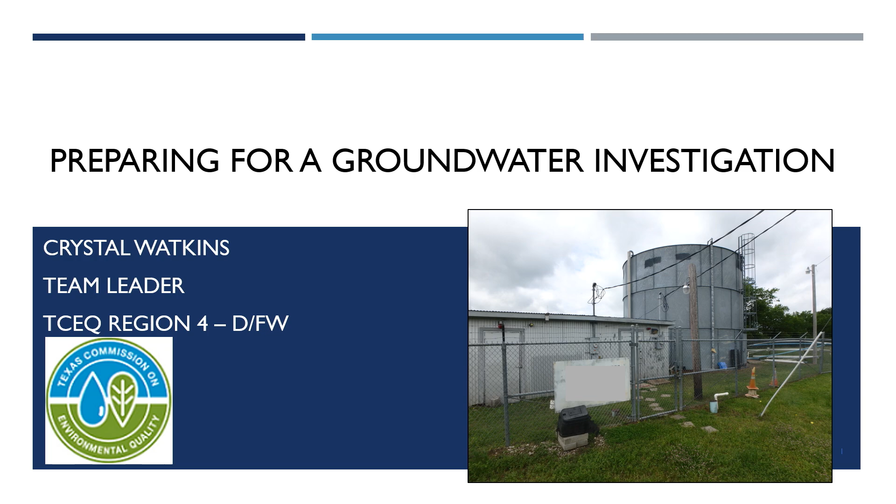Crystal Watkins is a team leader for the Public Water Supply Team in the Dallas-Fort Worth Region Office, in the Office of Compliance and Enforcement. She has a BS in Biology and MS in Wildlife and Fisheries Science from Texas A&M University. Crystal has worked for TCEQ since 2012 as an environmental investigator and now in a management role. Her duties include conducting drinking water investigations, managing a team of environmental investigators, and helping with interpretation of rules and regulations. Please welcome Crystal Watkins.

All right, good morning everybody. As Jackie said, I'm Crystal Watkins with the DFW Region Office, and my goal for today's presentation is to at least keep you from getting one violation from your regional investigators. My goal is for you not to have any violations, but that's my goal for today.

So what we're going to talk about is what is a comprehensive compliance investigation, what should you expect from that investigation, and some common violations that we see in the field, as well as some ways that you can make sure that you're compliant, and some tools for your operator toolbox.

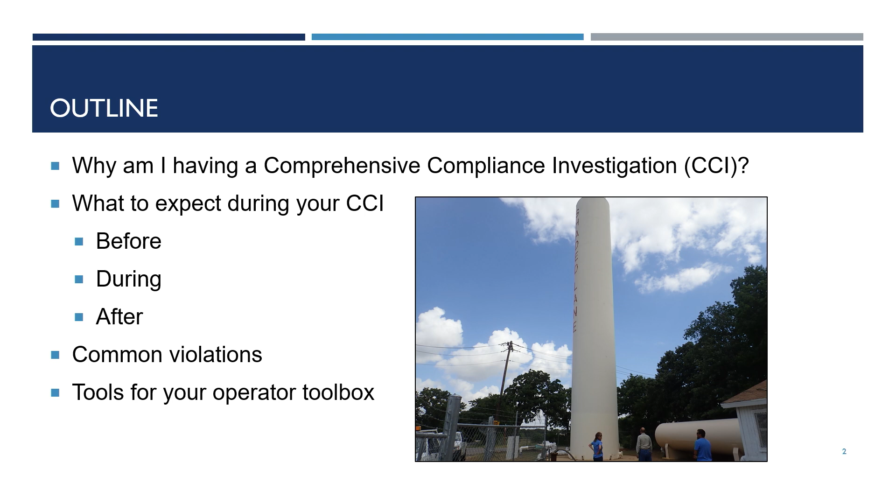So why does the TCEQ have to do CCIs? The reason is because EPA says so. Just like we have to tell y'all what rules and regulations you have to follow, EPA gives us rules and regulations we have to follow in order to maintain our primacy. Primacy just means that we have the ability to set rules and regulations for the drinking water program in the state. Now, if you talk to EPA or go to an EPA presentation, they will call this a sanitary survey.

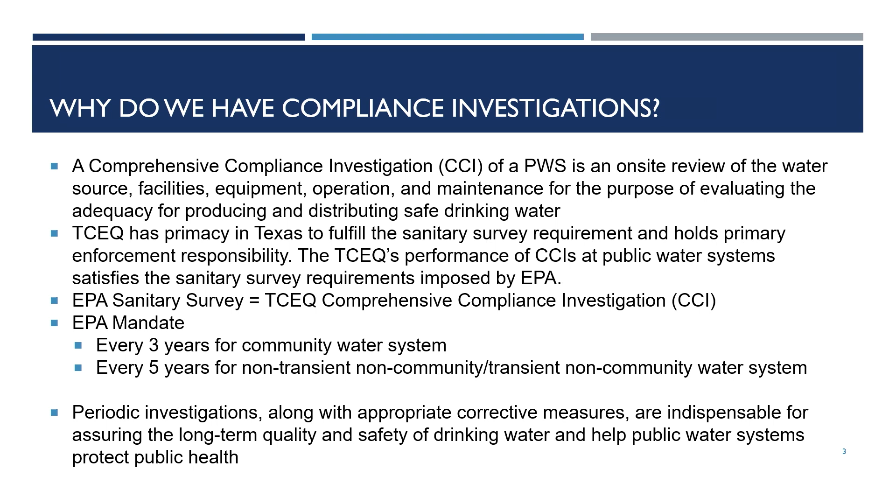This is going to be the same exact investigation that your region folks come out to, but we call it a comprehensive compliance investigation. For all community water systems, we have to come out once every 3 years, and for our non-community water systems, we come out once every 5 years. These inspections, along with correcting violations, are important in protecting public health and the safety of drinking water.

Now this is going to be one of the most important slides of the presentation: how can you prepare for this CCI? Like I said, we're going to send you a list of records. What you're going to want to do is go and gather those records. You can do it either way, but the way we usually see is most successful is when records are labeled 1 through 25. If you set it up with, say, this is number 1, this is number 2, that allows the investigation to go a little bit faster and smoother during this time.

What I highly, highly recommend is you do something called a pre-inspection walkthrough. We have seen that water systems that do their own internal inspection before our compliance inspection are the ones that tend to have less violations. This is things like looking at leaks, looking at your vent screens, looking at any fences, mowing your grass, and please make sure that you check your chlorine residual.

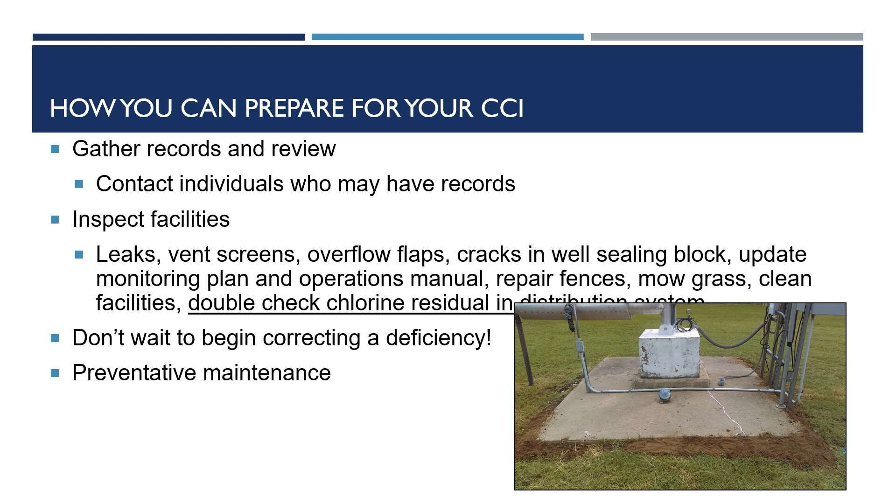That's very, very important. We like to say that there's something called a TCEQ bump, and we know that sometimes people will bump up their chlorine really high to prepare for TCEQ - and I hear laughs because some of y'all do it. We appreciate that because we do not want to have to come out and cite a violation for low chlorine. If you do notice a problem, do not wait for us to come out to fix the problem. And finally, if you have any preventative maintenance items, you might want to check those. Your biggest preventative maintenance item we see is maintaining the area around your facilities.

So with your inspection, or your CCI, there's going to be a couple different parts of it. You're going to have an entrance meeting where we're going to introduce ourselves and talk through the flow. Sometimes, I know for me as an investigator, I like to do paperwork first, but when it's going to be 108 degrees at 2 o'clock, I'm not trying to be out in the field.

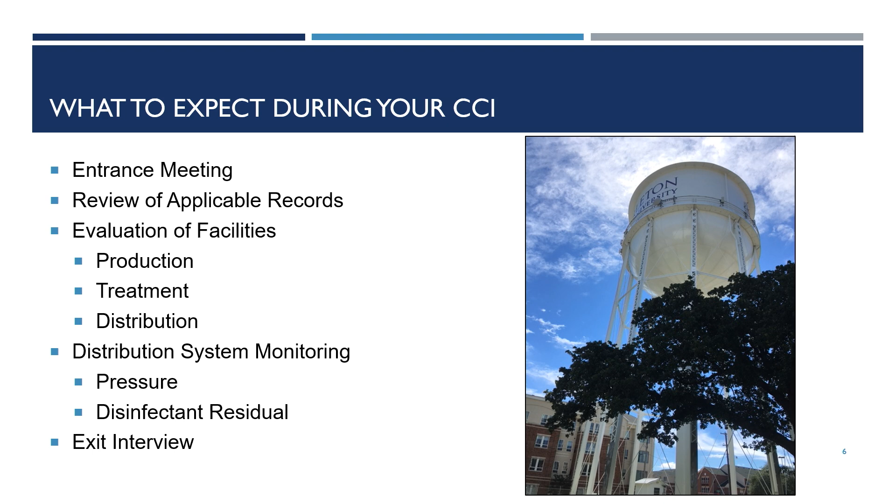So they might do field work in the morning versus in the afternoon. We're going to review our records and go to all your applicable facilities, then finally into the distribution system. To wrap it all up, we do an exit interview, and you'll get an exit interview form that notes any violations or corrections we recommend. We're gonna outline our objectives.

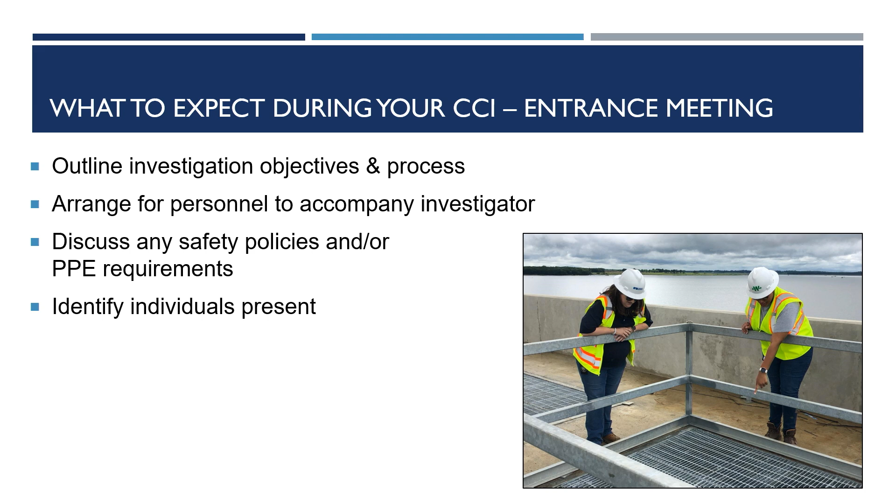If there's any PPE, we're going to ask what we should have, and then identify anybody who is present. Now one thing I do want to highlight, because we see it quite a bit, is what is a connection.

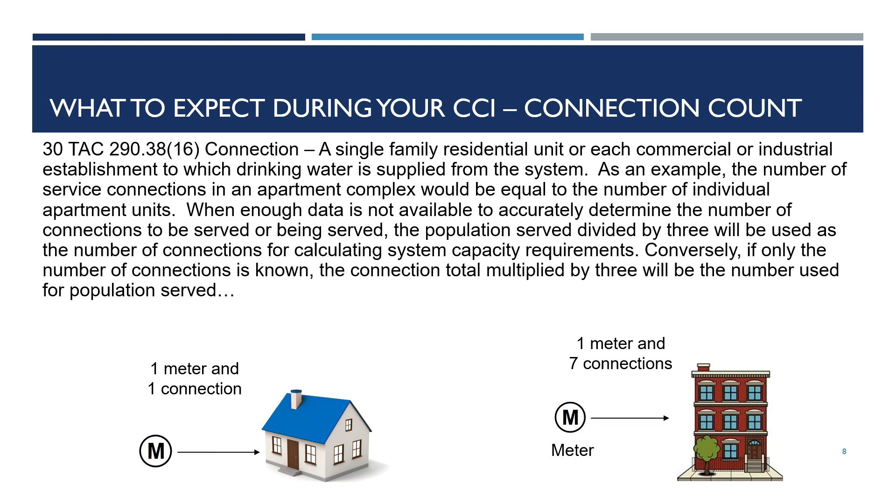The definition of a connection is a single-family residential unit or each commercial or industrial establishment. So if you just serve homes, one connection equals one home. However, if you serve something using a master meter, like apartment buildings or RV parks, the 1 meter to 1 connection rule does not work here. You'll have to count each individual unit behind that master meter.

You might have heard in previous presentations about the 8-to-1 rule. During the last legislative session, it was established that for RV slots, if there are 8 RV slots in the park, it counts as 1 connection. So your investigators may ask if you serve RV parks, and your connection count might grow because of this new rule.

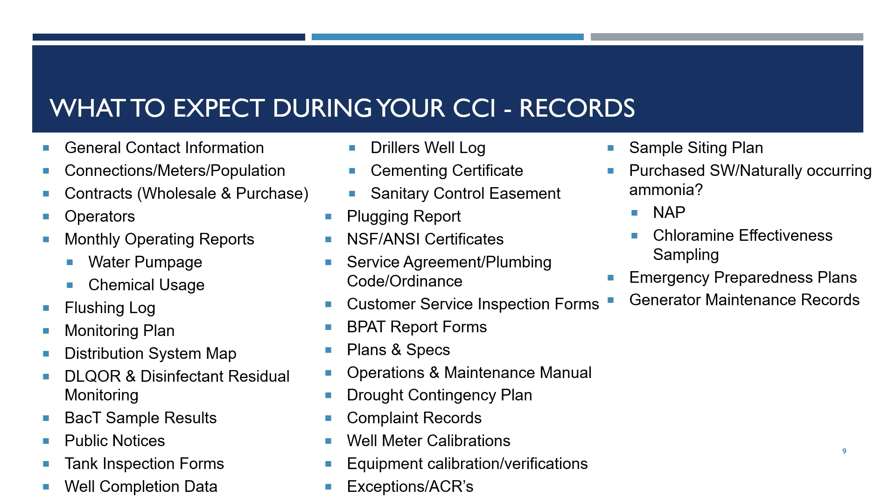So here are some of our requirements. Let's talk about monthly operating reports. We call it that because we borrowed the term from surface water, but this is just the amount of water you're using weekly or daily, the amount of chemicals you're using weekly and daily, and your disinfectant residual weekly or daily. You can have this all in one document or keep it separate, whatever works best for your water system.

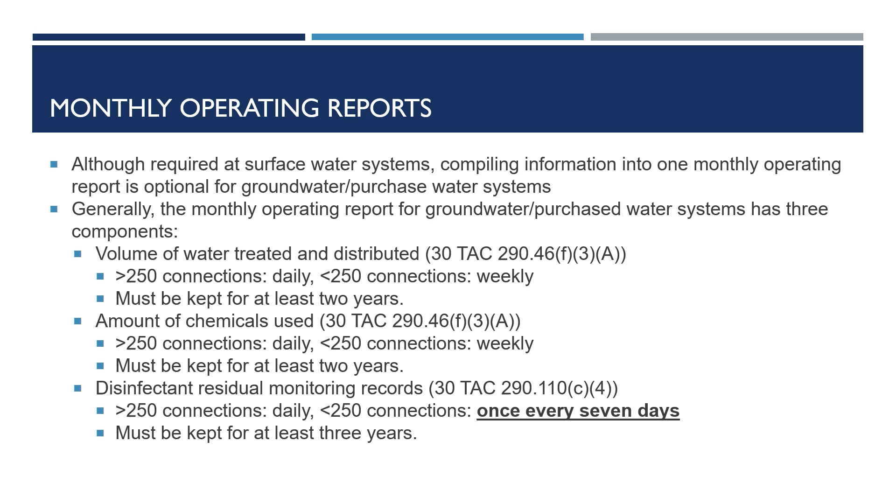If you have less than 250 connections, you have to monitor weekly. If you have more than 250 connections, you have to monitor daily. One thing I really want to highlight is the wording difference between weekly and every 7 days. Your disinfectant residual monitoring has to be done once every 7 days, and that's different from your volume of water treated, which is once every week.

So for volume of water, if you monitor on a Sunday and then the next week you monitor on a Tuesday, you're compliant with the rule. But you would not be compliant with the every-7-days rule because you went more than 7 days. What we tend to find is most water systems will just monitor everything once every 7 days.

Some common mistakes we see: not recording the amount of water according to what the rule says, so people do it once a month or twice a month instead. If you have less than 250 connections, you should do it once a week. If you're more than 250 connections, you want to do it every day, including weekends. That's one of the other things we note as well.

Another thing we see with chemical usage data is not recording how much chemical is actually used, but instead counting how many bottles were put back into the reservoir. It's really important to know how much chemical you're using, because that information determines where your chlorine residuals should be based on demand and volume of water treated. Make sure you keep accurate records. One way we've seen: if you have a clear barrel and use sodium hypochlorite, people mark the side of the barrel with a conversion of how many inches equals gallons.

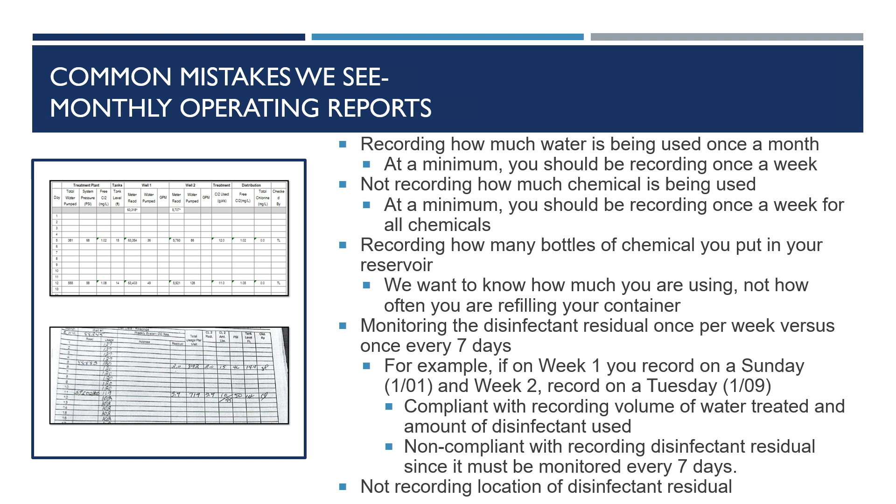One of the rules we check during our investigation is determining if your disinfectant residual sites are representative of your distribution system. If you don't have that location noted, it's hard for us to determine compliance. We also do complaint investigations in addition to CCIs, and one of the things your investigator will ask is, can I see your chlorine disinfectant residual records? If you have those locations, we can use that information to substantiate or not substantiate a complaint.

Tank inspection forms. The rule says all ground storage tanks and pressure tanks have to be inspected annually. And if your pressure tank has an inspection port, you have to go inside and do an interior inspection once every 5 years. Another common thing we see isn't necessarily a violation, but something we might note as an additional issue.

You want to make sure each one of your ground storage and pressure tanks is on its own separate inspection form. If you just do one that says everything is good, or one form for all tanks with a noted problem, we can't tell which one needs to be addressed. You can do the inspections yourselves, water system personnel can do the inspections themselves.

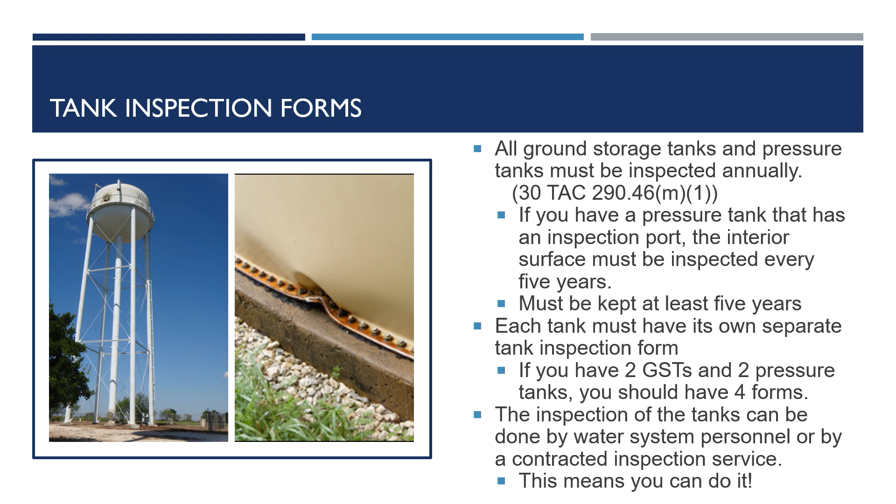I know that's something we've run into where people think you have to hire an outside contractor, and that's not absolutely true. If you're brave enough to climb up the elevated tank, have at it. I'm not, so you can hire a contractor or send your bravest employee up there to do the inspection.

I wanted to show some things we've seen in our inspections. This is actually a dead mockingbird in the ground storage tank. This was the first tank of the day for the inspection, and so I climbed up there, and then climbed 13 other tanks over the next 2 days just to make sure there were no other birds, and luckily there weren't.

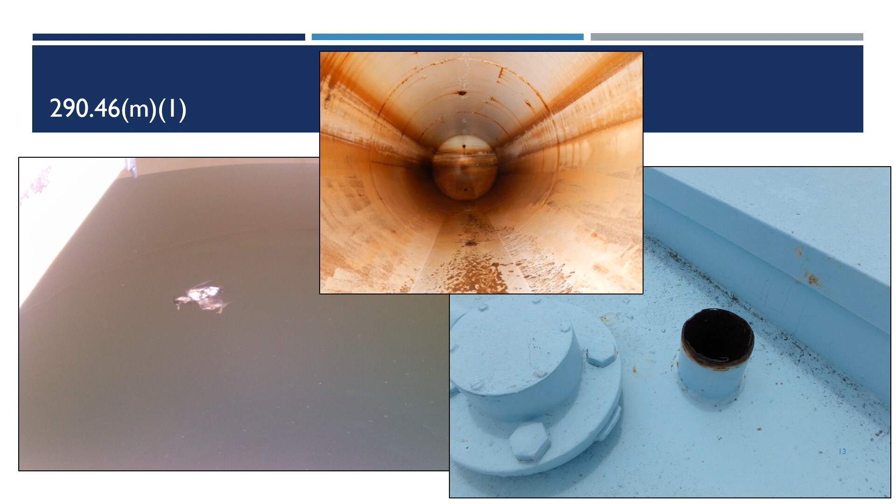We also can see rust on the inside of your pressure tank, which can tell us you might have issues with it, and it may need to be put out of service for maintenance. If there are any open holes or whatnot, make sure you're addressing and fixing that, because these are ways pathogens or birds can enter into your ground storage tanks or elevated storage tanks.

Here's what the forms look like. This is a TCEQ form you can find on the TCEQ website. You can use this form, we see quite a bit of people use it, or you can use something you've created yourself. You just want to make sure your internal inspection form follows the requirements of 290.46(m)(1).

Problems we find: again, one tank equals one form. That might not necessarily be a violation, but it's something you want to make sure you're doing as part of your pre-investigation check. Make sure to identify the tanks, especially if one of your tanks is in fairly bad condition, so we can match them up.

This is also important for complaints too. Sometimes if someone complains about brown water, is it really a manganese iron issue, or is it because one of your tanks is really rusty on the inside? And not inspecting your pressure tank once every 5 years with an inspection port is another issue we see.

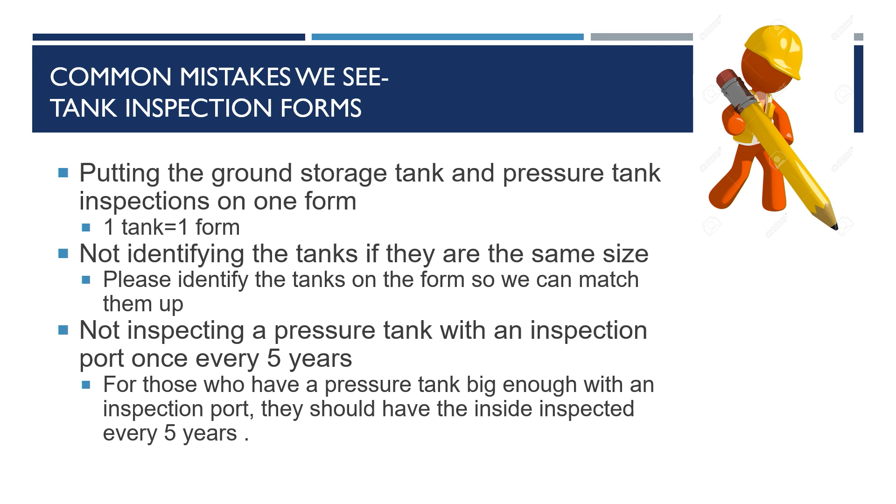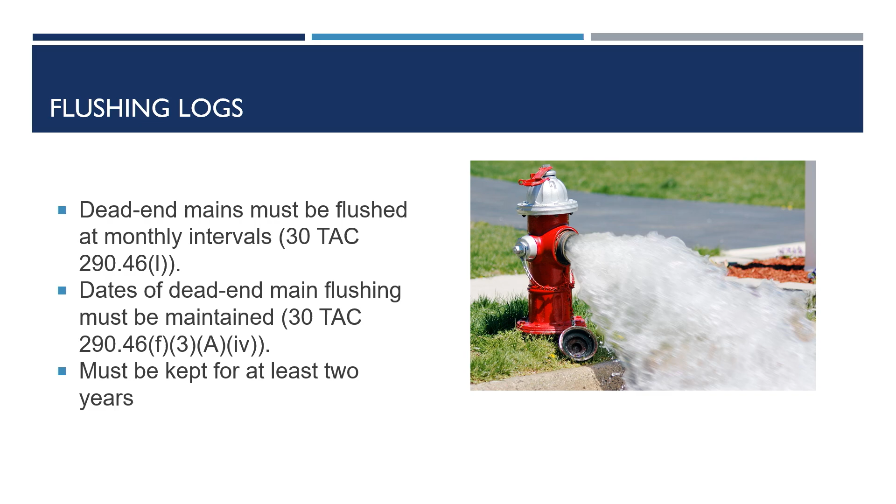Flushing logs. The rule says all dead end mains have to be flushed once a month, and you have to have the dates of the dead end mains. There are a lot of other water systems, which we're very appreciative of, that do a lot more best management practices, noting how many gallons they flush, the chlorine residual, things like that. That's absolutely great, but the requirement just says the dates, so make sure you put the dates.

I also recommend putting the addresses of where you're flushing. When we're looking at your distribution map and identifying your dead end mains, we can ensure those are being flushed on a monthly basis.

The biggest thing we see is not having a flushing log, so make sure to have one. If your system is looped, just make sure you have a map showing that it is looped, and therefore you don't need a flushing log.

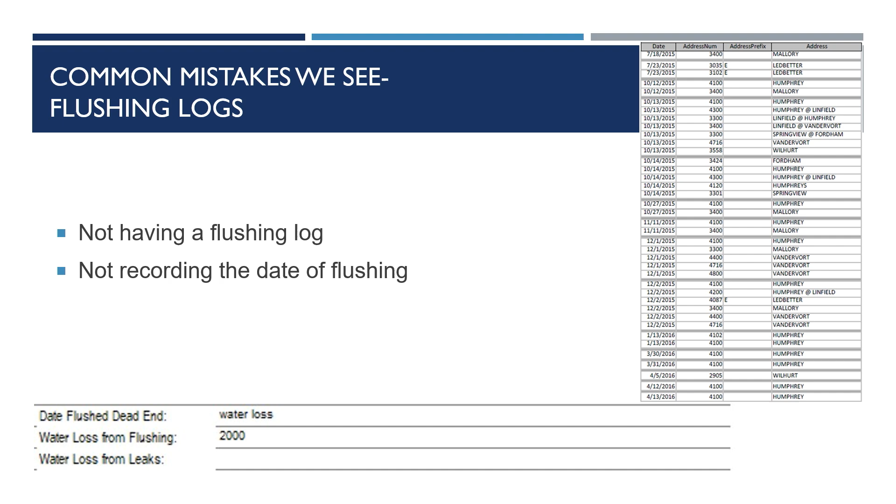The rule also says you should flush on a customer basis. So even though you're a loop system, you may still have a flushing log because you are flushing based on customer complaints. You also want to make sure you are recording the date — right here where it just says water loss is not compliant, and we would note a violation there.

One of the things I want to mention is in December 2023, there was a set of new rules that came out, a lot of which came through Winter Storm Uri. One of the big changes in terms of record keeping is your plant operations manual.

Before, the plant operations manual was a little bit small, a little bit skimpy. Now it has expanded to a very big document, probably very similar to one of your monitoring plans. That rule is still in 290.42L, but you have to identify critical plant equipment, treatment chemicals, which vendors, if you need backup vendors, where you can get chemicals, where you can get supplies, key personnel, and other information.

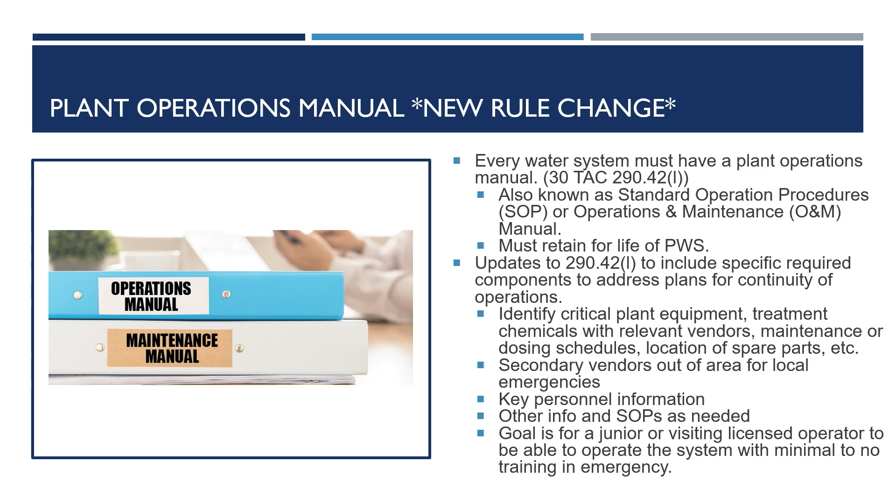And SOPs as needed. So if you have a certain iron filtration system or some other unique treatment system, you're going to want to have an SOP on how to manage that. The goal is that junior personnel could come in, look at your SOP and your plant operations manual, and operate the plant. This is another document that could be very helpful.

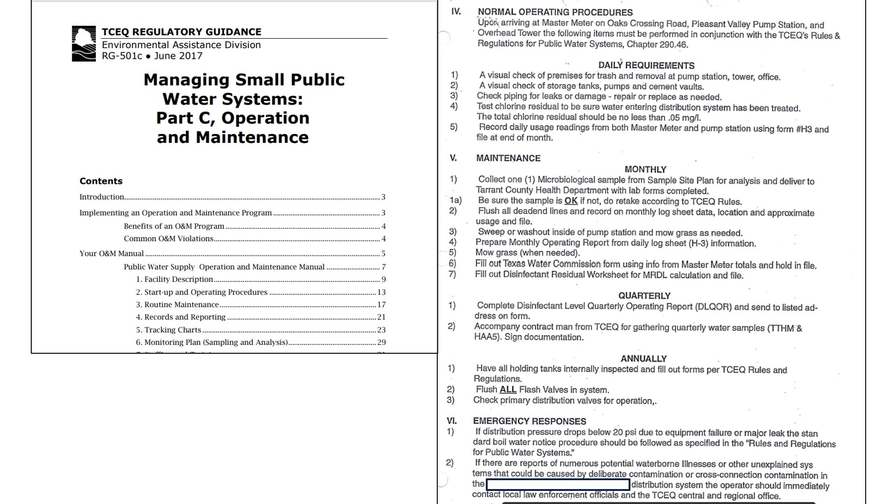One of the reasons we expanded the plant operations manual is that after Winter Storm Uri, there was an after action review, and a lot of operators indicated in our roundtable sessions that they were ill-prepared or didn't know how to operate some of the key critical plant equipment. So our thought is, of course, let's give you more paperwork to fill out — but we're hoping this expanded plant operations manual can prevent something like that from happening again.

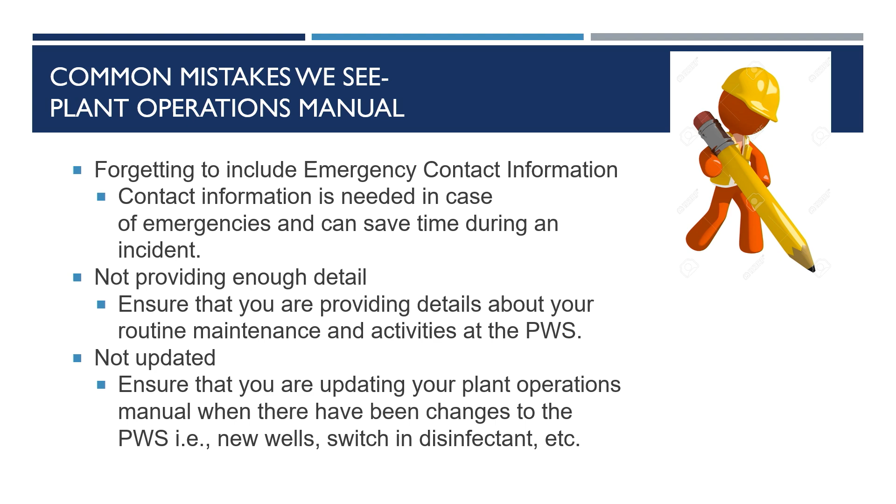Some of the things we see are not having emergency contact information, which is one of the key requirements of the plant operations manual, not providing enough detail especially with the new rule change, and not updating it.

So if you're a water system that went from having a well system to a purchase water system, or changed from liquid to gas, we don't see a lot of people update their facilities at that point. Make sure when you're having a significant change that you're going through things like your monitoring plan and your plant operations manual to make sure it's up to date.

Backflow. The BPAT — backflow prevention assembly test and maintenance form — is very, very important. We've seen in the last couple of years that having a compliant BPAT form has made or broken a situation we had.

It's part of a cross-connection control program, and that program helps ensure you are protecting your water system from the outside. That includes your customer service inspections, a plumbing ordinance if you're a governmental entity or a customer service agreement, and then your backflow form.

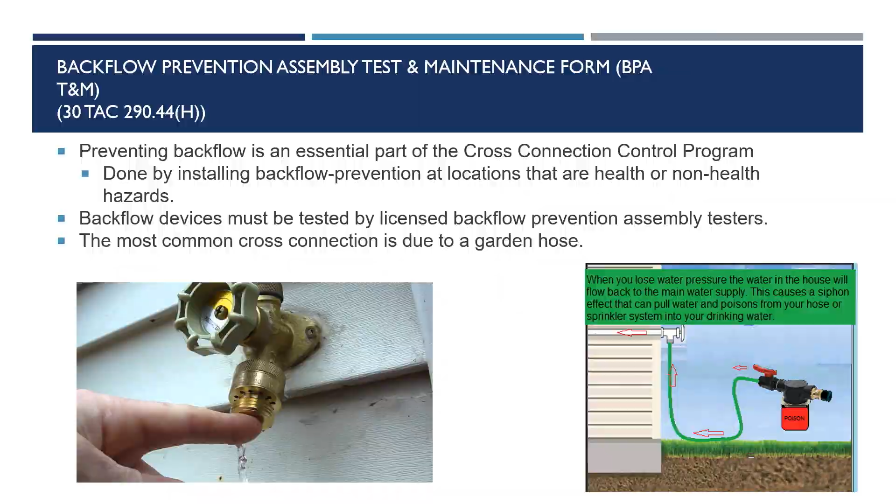Your backflow devices have to be tested by a licensed tester, and the most common cross connection is a garden hose. Someone dumps a garden hose into their swimming pool to fill it up, there's a break outside, and now that chlorinated water is pulling back into the distribution system.

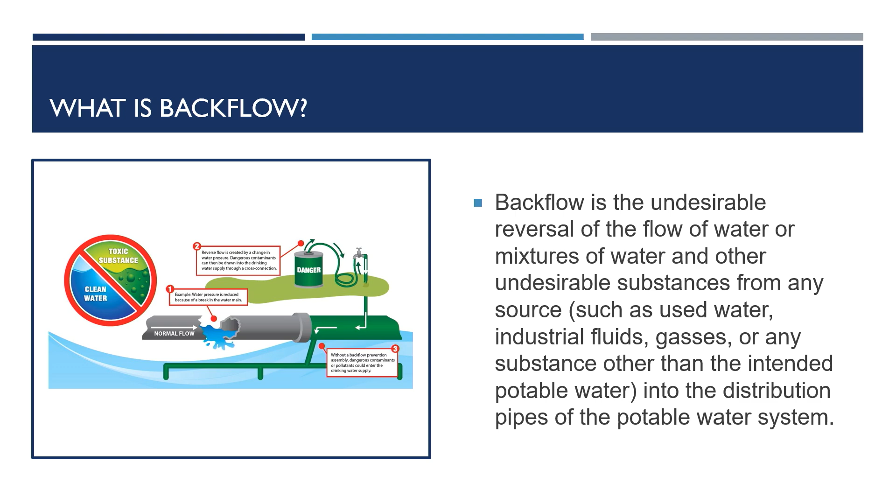If you're not aware of what backflow is, it's the undesirable reversal of flow of water or mixtures of water and other undesirable substances. A backflow of coffee, which sounds great since you'd have an unlimited supply, is actually an undesirable issue because some people may have interactions with caffeine in their medication.

In our rules, we have a list of facilities that will qualify for having backflow. Items considered a health risk need to have either an air gap, an RPZ, or an RPBA, and those have to be tested annually.

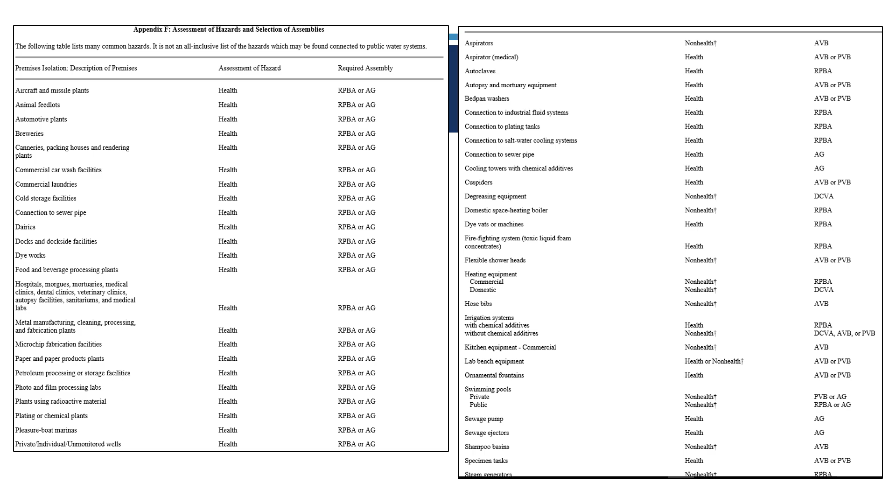As an investigator, what I will do is take this list and start Googling. So I will search 'City of X dentist office' and build a list of facilities. I will also ask the water system if they have this information.

If you are a city and you have a wastewater or pretreatment program, that program is going to have a list of people who are using that water. That will be a great start in trying to figure out the systems that can cause a health hazard.

One thing I want to point out is that interactive water features and splash pads are considered a health hazard, so you want to make sure those items have an RPZ and are tested on an annual basis. Some of the common items we see is having an outdated form.

The form has been updated, I believe in 2019, and you want to make sure you're using the right form. If you want to use a form that's different from our standard form, you have to obtain approval for use of an alternative backflow form. If you're going to use an outside company to have electronic versions, you're going to need an exception to the rule for that as well.

One thing we do see is that the test gauge that your backflow tester uses is out of date. So when you're looking at the backflow forms from your customers, make sure the tester's gauge is within a year of when the test was done.

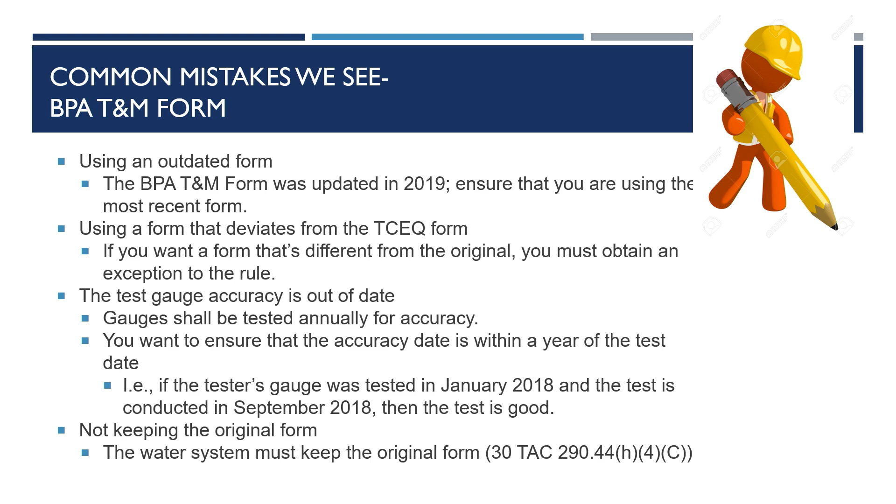Another issue is not keeping the original form. If you're a facility or system requiring people to submit backflow forms, make sure to keep the original and give them the copy.

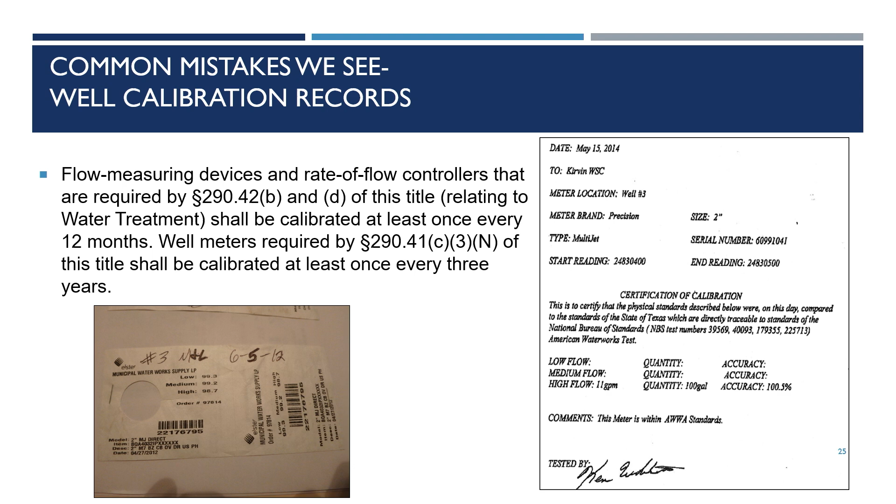Well calibration records: if you have a groundwater well, you have to calibrate your well once every three years. You can either calibrate it or replace it. We had a question about this last year.

You can do self-calibrations of well meters as long as you indicate what method you used and keep that information. But some of the common issues we see is that people doing self-calibration aren't putting in information about dates or what the expected result was versus the actual result.

Another new thing that has come up is emergency preparedness plans. Winter Storm Uri caused a lot more paperwork to be generated. This document used to only apply to Fort Bend and Harris counties, but now it's included for all systems across the state.

If you serve one residential connection, you have to have an emergency preparedness plan. But if you're a non-community system like a warehouse with nobody staying overnight, an emergency preparedness plan does not apply to you.

We do have options for water systems that are not financially able to implement an emergency preparedness plan or some of its options. You can ask for a financial waiver. There are 14 options, but actually more since some options have an A and B variant.

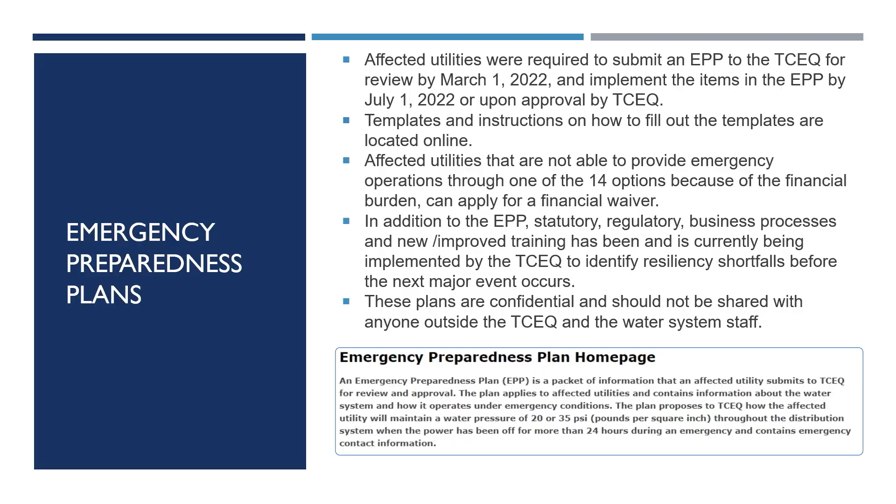One thing I want to point out again is that for emergency preparedness plans, you do not have to enact the plan every time there's a water outage. The plans come into play only when there's an extended power outage. So if you have a water leak and water goes out, that does not mean you need to enact your emergency preparedness plan.

Another new requirement is generator maintenance in relation to emergency preparedness plans. If you have a generator, we now have a lot more rules about how to maintain it. I believe that's rule 290.46(m), possibly subsection 4.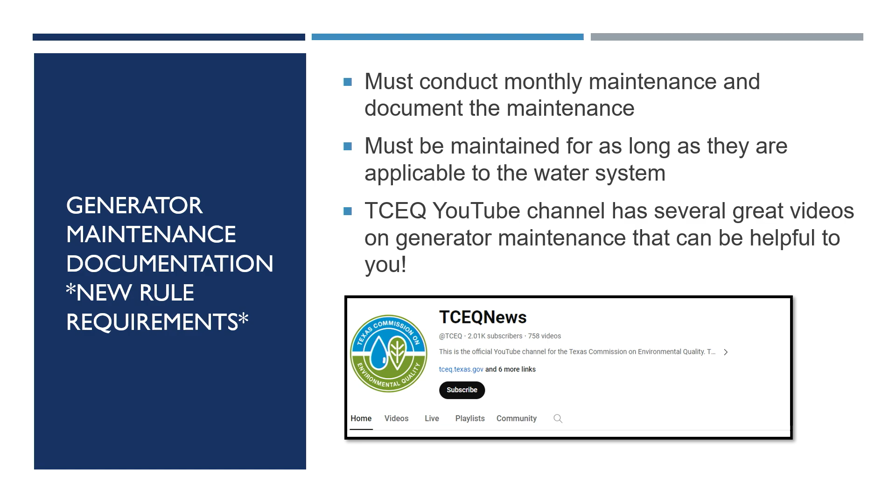One of the big things is you have to be able to run your generator, your whole system, under 30% load for at least 30 minutes once a month. You also have to check your generators once a month for a list of items in our new rules. On our TCEQNews website or YouTube channel, there's a generator maintenance video series that's very detailed and can help you with maintaining your generators, as well as information about emergency preparedness plans.

All right, so we got through all that paperwork.

Now we're gonna go out in the field, and we're going to look at everything from where the water comes out to right before it hits into your distribution system.

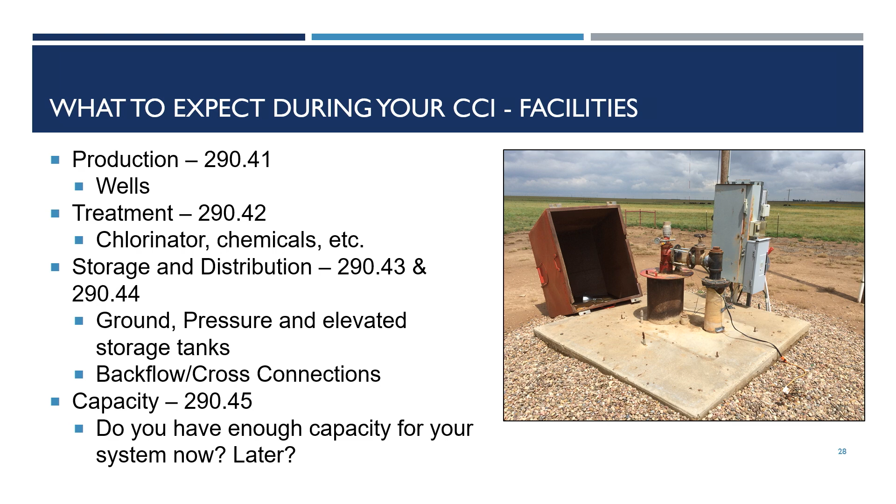Some of the things I want to point out—these are all real photos, but those who are in these photos are protected for their identity.

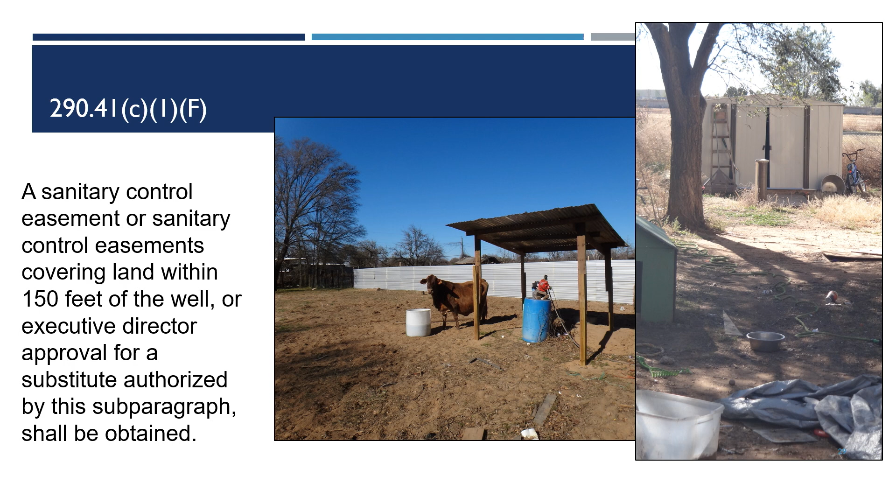Make sure there's not a cow near your well. That blue thing is covering the well, and there's a pump, and there is a cow. Needless to say, the water coming out in that area was pretty foul. You want to make sure you have a sanitary control easement that protects your well 150 feet away, and specifically, livestock are not allowed within 50 feet of the well. I think that's a little closer than 50 feet.

Now, I know some of your pump stations are near a neighbor who has livestock, and sometimes they come right up to your fence. What you can do is ask for a sanitary control easement exception. That's for when you cannot guarantee you can keep all hazards within 150 feet away. Usually we would require you to take a raw bacteriological sample for a month to make sure that granting this exception is not causing any contamination of the well.

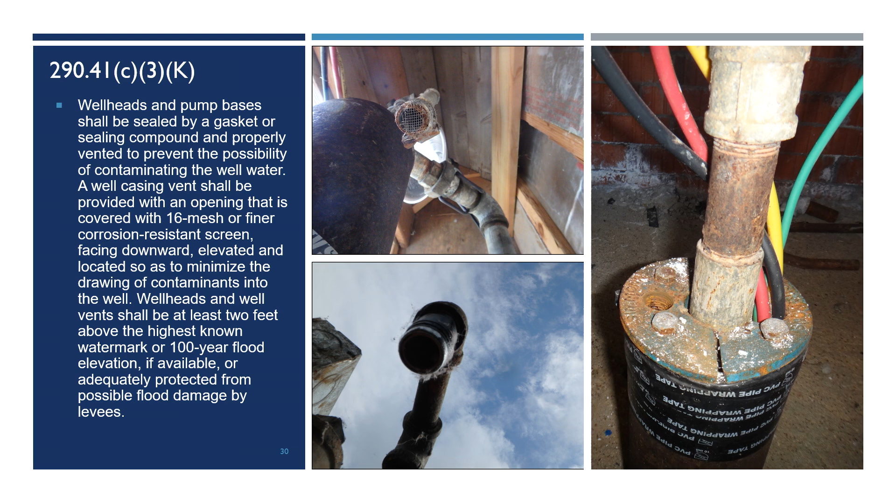Next is some other well items, such as making sure that your wellhead is sealed and doesn't have a big crack. Another thing is making sure your well vents are gooseneck—pointing downward—and covered with a screen. A lot of our rules are about preventing any potential sources of contamination from impacting the water system at different points. So this is the source water protection that we have.

We do require disinfection, and despite what some people in Texas think, chlorine is not going to kill you, but we get those complaints quite a bit. We want to make sure you're disinfecting and your equipment is being used appropriately.

One thing we do see is people using household bleach, and that is not appropriate. You want to use something NSF Standard 60. Back when I started, there was a list of bleach you could find at common grocery stores. I think someone found out we were recommending their product and said, we cannot guarantee this. So now you have to use NSF Standard 60. There are vendors or manufacturers that will sell you NSF Standard 60 bleach in that small gallon size. You can reach out to your appropriate vendor for that information.

I always love seeing the trash can holding area. Just make sure you're using an appropriate container that can hold the volume of liquid, as well as making sure it's not open to the atmosphere.

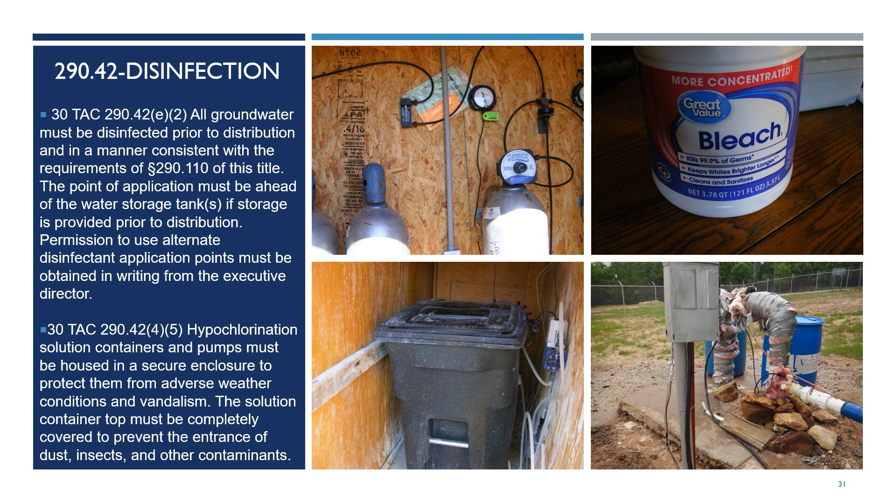You also want to make sure some of your facilities are protected against adverse weather. Having your disinfection pumps out in the open where they can be beat by hail, storm, and rain is probably not a good idea.

For water storage, we ask that your pressure tanks and ground storage tanks are meeting AWWA standards. A black poly tank is not an AWWA approved tank; however, TCEQ will sometimes provide exceptions for using a black poly tank. If you try to put in an exception for a white poly tank, you're going to get it denied, because we've seen algae grow into white poly tanks left outside. So even if you don't have AWWA approval, you can always ask for an exception, and if you provide the information, there's a good chance it can get approved.

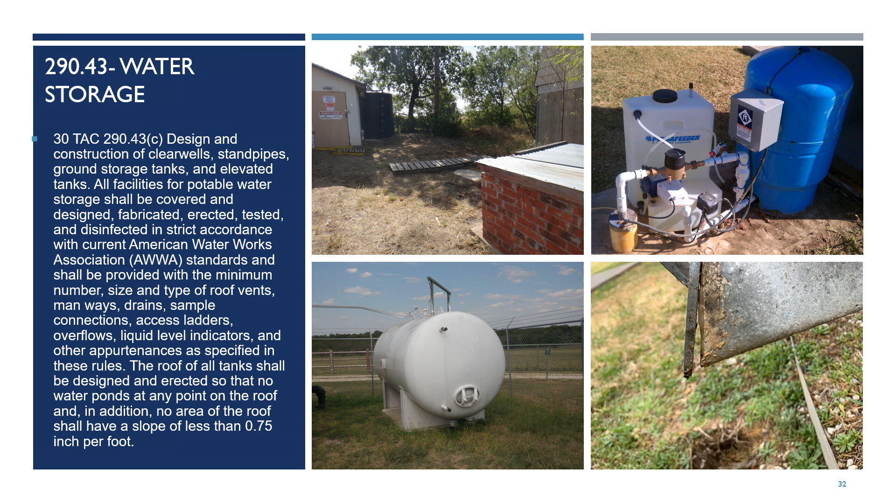Another thing we see is with your overflow valve—you want to make sure it has a gap no bigger than 1/16 of an inch. That is a very common violation we would note during a CCI.

Your distribution lines have to be underground, not just crossing a creek held together by duct tape and a prayer. What was notable in this instance is that along the creek, you could see lots of broken parts where it had broken and the water system fixed it. Yeah, it was not fun.

This is also a water line that is less than the requirement underground, I think it was less than 2 feet. So if somebody was doing road construction, like if the county comes in and starts breaking up the road, well, now they hit your water line.

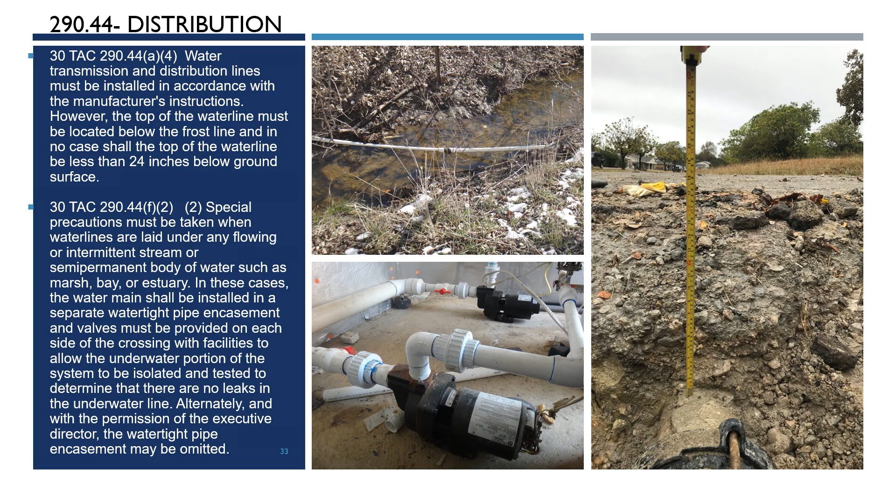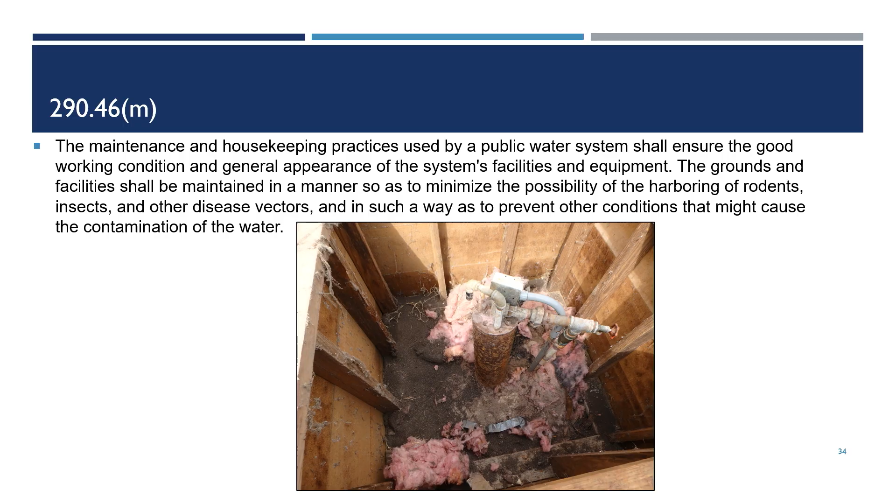We also have a general housekeeping violation, so you want to make sure your facilities are in good working order. Make sure your grass is not knee-high, and take all the trash away from your pump station and facilities. You want to make sure you're not providing a haven for vectors or critters to stay around your area. I'll tell you, one of my investigators went on an investigation, and when he opened up the pump station, there were like 200 cats in there.

There was a hole, and the guy said, heck, like 2 weeks ago there was double the amount, but some illness got them. Isn't that what you love to hear? And get this, it was a restaurant. Don't you love to hear that? So yeah, just make sure you're not providing a haven for ill and sick cats to come around your well and potentially pass on any vectors.

Another thing we also see, I think in this picture, my staff member found a 6-foot long snake skin. So I always make a joke that if I get bit by a snake, you're going to enforcement. That's not anything in the rule, but if I see a snake or if I get close to one, we're not gonna have a good time.

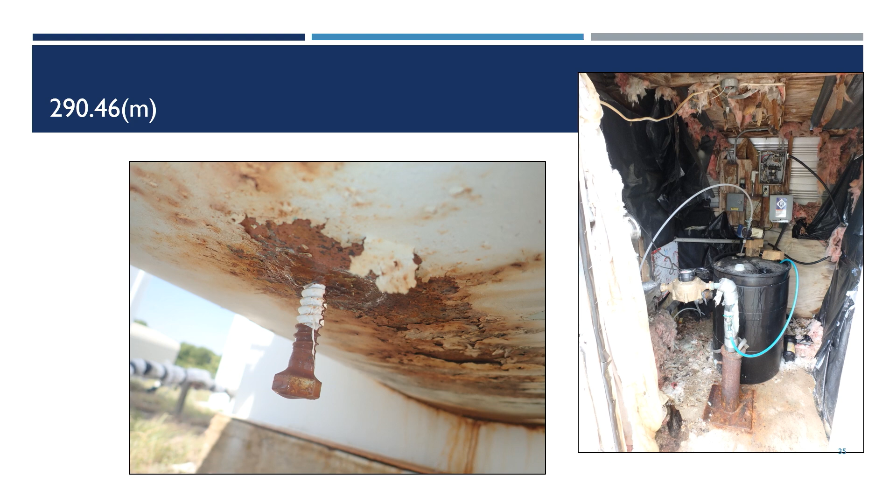Just rustiness, just making sure you are taking care of your facilities. We understand that things get broken down over time, but just make sure you're taking care of them, because if you continue to ignore some of these preventative maintenance issues, it's gonna become a bigger problem later.

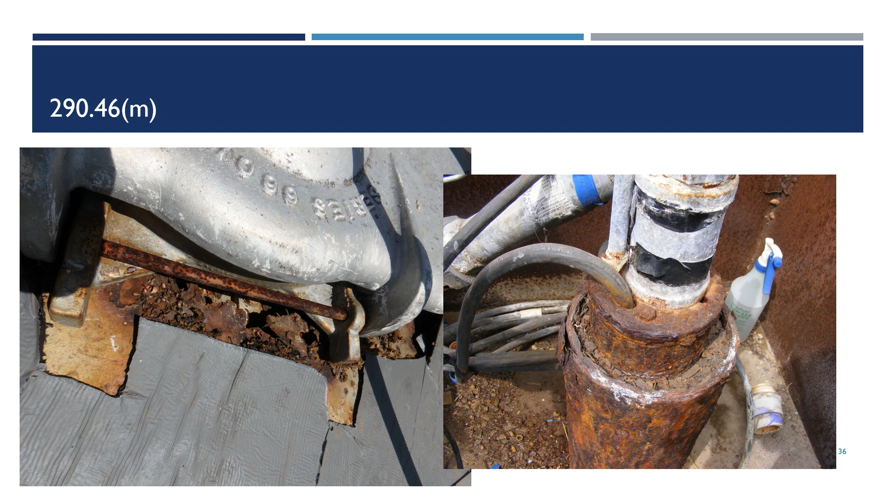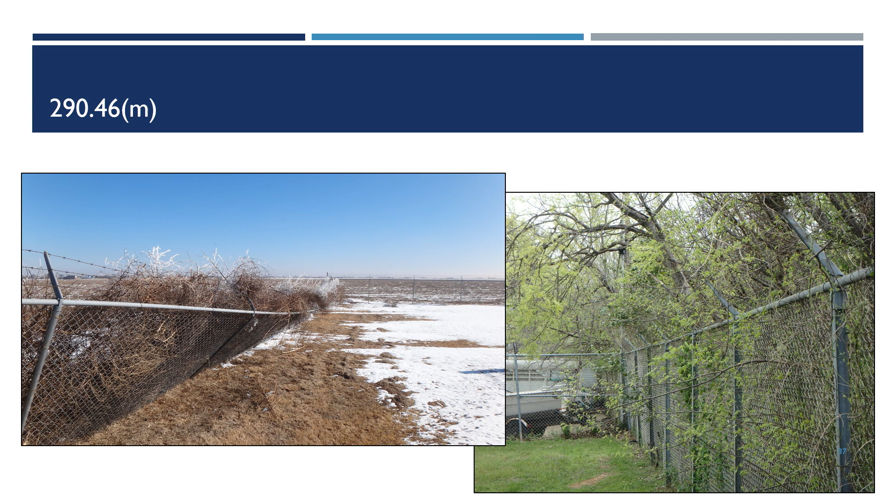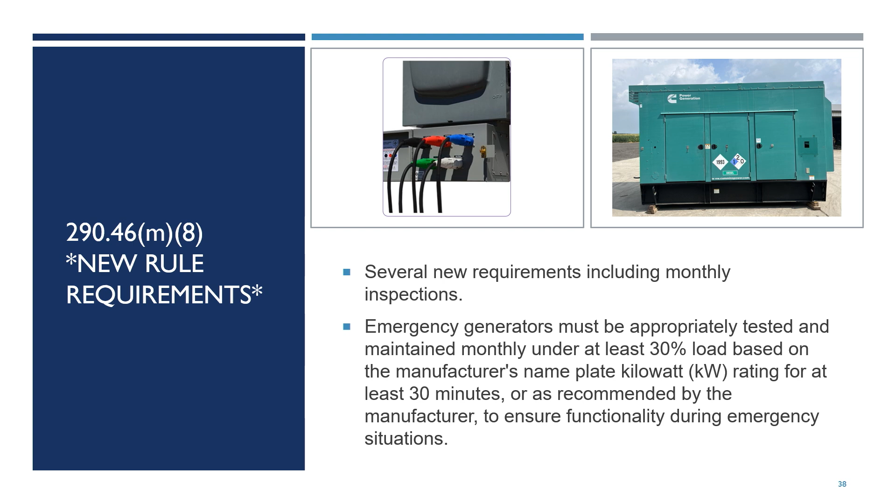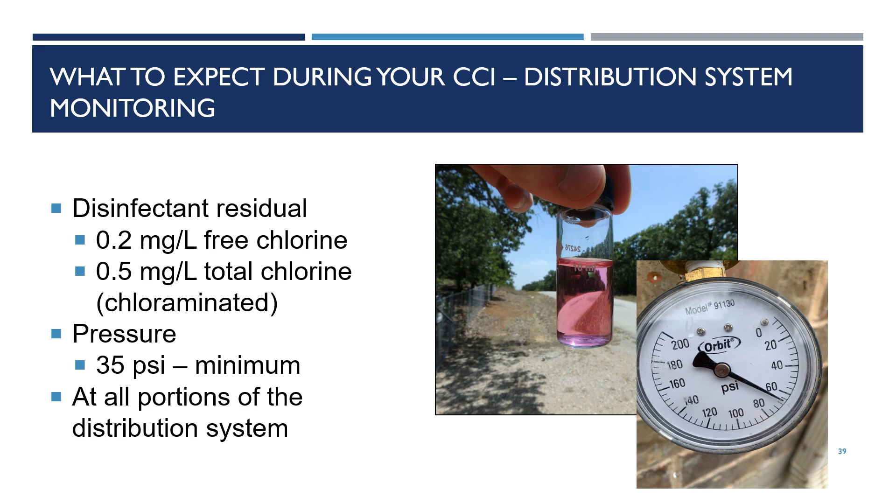You also want to make sure you have 35 PSI. Don't be surprised if your investigator wants to go to the dead end, the furthest point in your distribution system, because for us that's going to be the most vulnerable part. If you have good residual and pressure at the dead end main, you can be assured that for probably the majority of the system, you're fine. Another thing we might ask is if you have an area with a lot of low usage, we might ask to go there as well.

So you've gone through the inspections, and because you remember Crystal's presentation, you got one less violation, but you still may have had some record reviews or other things that the investigator needs to check. This is just a preliminary notification. Your official notification is going to be the notice of violation. So just to give you some terms, if it's an AV, it's an alleged violation that the investigator noted.

If it's a PV, it's a potential violation, which is something the investigator thinks could go either way. An RR is a record request, so we might ask you to provide records within 14 days. If somebody notes a record request, make sure to get it to them, because if you don't, that record request becomes a violation. Some investigators will also note additional issues, known as AIs. Additional issues are not violations, but they're items that could become violations if they're not addressed.

If it's not a super busy year for your investigators, you should get something called a summary of investigation findings, and a notice of violation if you have any violations. If everything was great and good, you're going to get that magical golden letter called a general compliance letter. Your timeframes for resolving violations are going to be based on the NOV letter date.

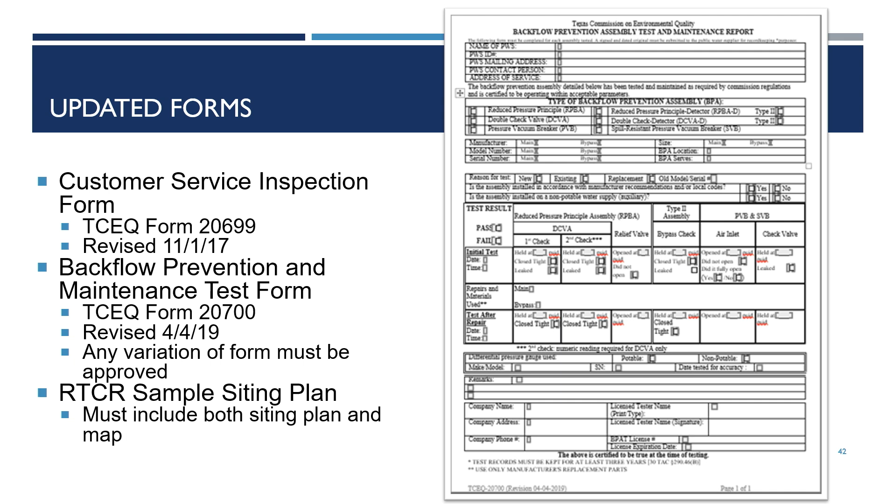Some items I wanted to highlight here is that there's a lot of helpful guidance documents on our website. Of course, we have the rules, and Managing Small Public Water Systems. I know our Small Business and Local Government Assistance program has been working on items called compliance notebooks. So pretty much if you fill out the information in this compliance notebook, I think it meets everything for the paperwork part of the rule.

There's some copies, I think, for non-community systems that I saw in the TA room, so pick those up and take a look at them. Our TCEQ website is better than it was in the past, but there's lots of really good resources that we have, so I highly recommend going there. Also, our TCEQ YouTube page has a lot of videos and trainings that can really help out if you need, so I highly recommend going there.

Some of the other helpful people we have are small business and local government assistance specialists. So if you talk to someone with small business and you have a compliance issue, that's kept between y'all two. They would not come back and tell Crystal, this water system doesn't have disinfection equipment. They will help you get into compliance. Also, financial, managerial, and technical assistance is a free service to everybody, and these highly qualified people will come to you at the time you need in order to ensure that you are being compliant with everything.

And I promise we don't bite, regional - your regional investigators are really good resources. There's a couple of people in here who call us and we can give them some information. We don't want violations, we don't want to cite violations, we just want to make sure you're compliant. So if you have any questions or whatnot, your regional folks and Water Supply Division are going to be a very helpful resource for you to use. And with that, that's the end of my presentation, and I could take questions.